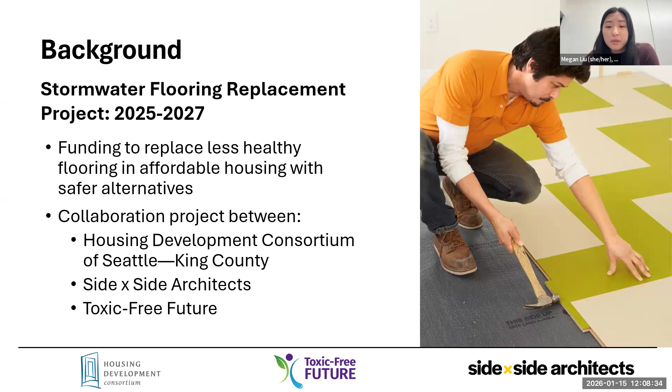Proposing to adopt safer materials in affordable housing, which would protect the health of affordable housing residents and reduce toxic waste and water contamination, we received funding of $1 million from the Stormwater Center in 2024 through the Washington State Department of Ecology, like Laura mentioned before.

And so right now we are currently underway with this project, and we are implementing this flooring replacement program by working with affordable housing groups in King County to replace less healthy flooring, such as vinyl and carpet, with safer options. Phase one is currently wrapping up, where we worked with DESC, providing funding for them to replace carpet in corridors and common areas with a safer linoleum flooring product.

Through this project, DESC was able to replace carpet in 6 buildings with linoleum flooring, which is safer for both health and the environment. And the specific buildings included 1811 Eastlake, Canada House, Morrison Hotel, Union Hotel, Rainier House, and Kerner Scott House. The specific carpet that they replaced was a Cambridge Oxford product. Again, this replacement was done in corridors and common areas, and that was replaced with a Forbo MCT linoleum flooring product.

As for phase two, we will look to expand upon phase one here and hopefully work with more groups across King County to replace hazardous flooring with safer options. This work will begin later this year to identify priority communities to partner with. And with what we've worked on and learned so far, especially from phase one and the research that we did going into it, we've gathered a lot of information on how this shift to safer flooring in affordable housing can be made. And we're excited to share these findings with you all today so that you can take this into consideration when specifying new products in affordable housing.

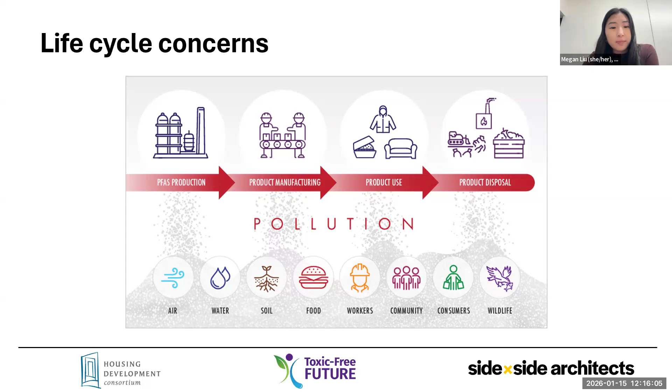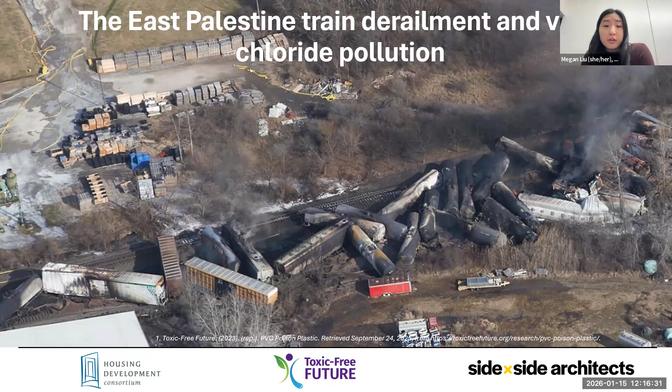And so this here is an example that unfortunately really captures why we are so concerned about the life cycle impacts of hazardous building materials. And this is the 2023 East Palestine train derailment in Ohio. Some of you might be familiar with this, but this is an incident where trains carrying toxic vinyl chloride, which is a known human carcinogen, actually derailed. We know that 99% of vinyl chloride that is produced is actually used to produce PVC plastic because vinyl chloride is one of the main building blocks of PVC.

And so when the trains carrying vinyl chloride derailed, this resulted in vinyl chloride leaking into the surrounding community. And the smoke plume that was released not only included vinyl chloride, but also other persistent harmful byproducts. And so we have actually found in our research at Toxic Free Future that the production of PVC releases hundreds of thousands of pounds of carcinogenic vinyl chloride into the air every year in the United States. So that also just goes to show that during production, this is already a concern.

But now with this example here, that was really, really unfortunate. We also know that transportation of these hazardous chemicals and materials in itself can also lead to further risks and harms to communities and environments along the transportation cycle.

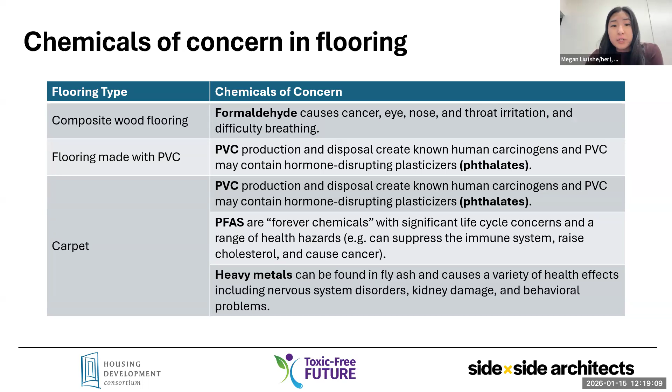And so these are all the things that we want to avoid, and luckily we know that there are safer materials that do exist. And so to wrap up my section of this presentation, I know I focused a lot on the concerns that we have around chemical use and the ingredients inside of our products. I want to say, though, that it's not all doom and gloom, and there are things that we can do to reduce harmful exposures to toxic building materials.

I would say that this flooring replacement program in itself is a huge success in recognition of the fact that we do need safer products, and that it is important for our communities to have safer building materials in their homes. I think this project really came together by the three organizations, HDC, Side by Side Architects, and Toxic Free Future, coming together and sharing our expertise. And that allowed us to really combine our knowledge and propose this plan to replace flooring in affordable housing.

I think the fact that we were able to receive funding from Ecology goes to show how important of an issue this is, and shows that they also agree that we need to make sure that we are using safe materials, being a critical thing for human health and the environment to prevent any disposal runoff when we dispose of these products.

Another thing here too that is really important, I think, especially for this audience, is it's important to note that Washington State actually leads the way on toxic chemical policies. One particular groundbreaking law that we have in Washington is the Safer Products for Washington Act. This is a program that is also run by Ecology. This is a law that was passed in 2019, which regulates priority chemicals of concern to health and the environment in priority product categories in 5-year cycles. I know that's kind of a mouthful, but basically this is a law that regulates different products and chemicals every 5 years in Washington State.

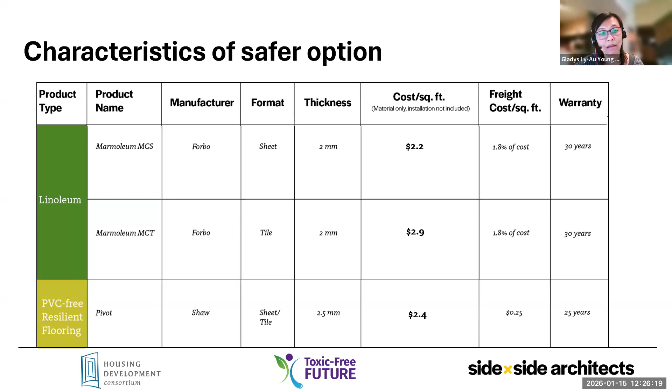So for our initial process, we researched over 40 flooring products. And the top row you see here shows some of these characteristics reviewed. There are more, but it's too many to show here. So then our final recommendation consists of 7 products, and here are 3 of them. And this research is cross-coordinated with Habitable's Informed red to green guidance, as you see the color chart on the left. I want to point out a few characteristics.

So vinyl flooring is typically about 2 millimeters thick, so any alternative should be similar in thickness. And vinyl flooring is also typically around $2 to $2.50 per square foot. An alternative would need to be comparable in cost. And linoleum, the safer alternative, can range in cost between $2 to $3.

So while there are comparable cost options, sometimes the cost of safer flooring might be more expensive, but it's important to keep in mind that these options typically have a longer warranty than vinyl, which has 15 years. As you can see, these options we are showing have 25 to 30 years.

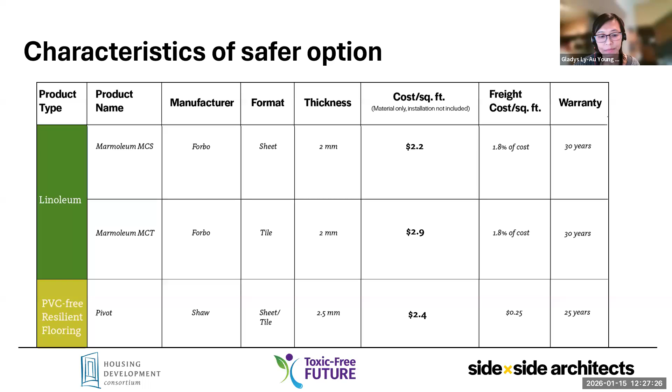So for this flooring replacement project, we have two criteria to meet when choosing the safer alternatives. Number one is using the Habitable Informed product guidance to select product types in the yellow and green section. And the other one is the product has ingredient transparency. I will introduce the Habitable Informed product guidance and the transparency in the next couple slides.

So Habitable Informed guidance is an intuitive red to green color ranking that compiles decades of their comprehensive research about health impacts of chemicals throughout the product life cycle. And as I mentioned before, Rebecca Stamm from Habitable reviewed our research on flooring products and helped us rank the products using the red to green color ranking. And I also mentioned that for the safer flooring criteria, we use the yellow and green section. So the full spectrum is from red to green, but we only allow the yellow, light green, and green rankings for our safer choices.

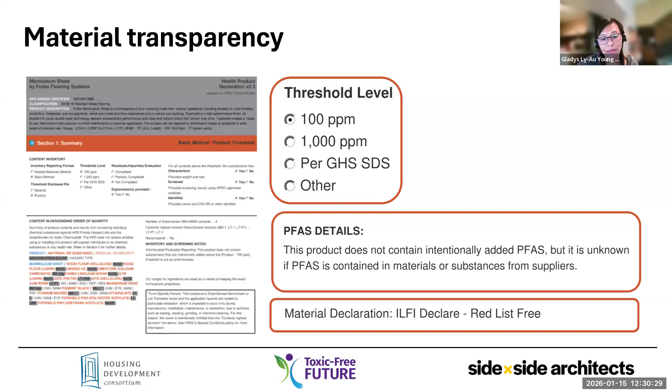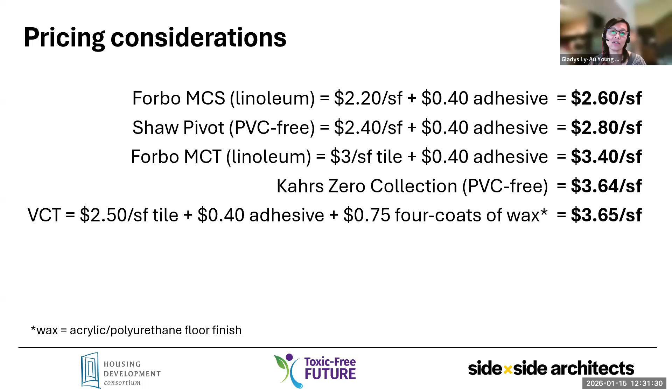The vinyl composition tile, VCT, is very commonly used and is around $2.50 a square foot without the adhesive. Sometimes what is not included in this cost equation is the coating that you need to put on top. And as you can see, it is really achievable if you put a little time dissecting the cost of what you're paying for the vinyl flooring.

Key takeaways for this phase 1. Cost, as I already mentioned, is one of the goals of the flooring replacement project: to help the affordable housing sector understand that there is cost parity, especially if we aggregate our purchasing power. So I spent time developing relationships with manufacturers and distributors to get lower costs for the affordable housing sector.

But some of these manufacturers are recognizing the importance of that, and they're offering everyone these lower cost supply chain and availability. So this group purchasing power will help shape our supply chain by indicating that the affordable housing sector needs healthy, non-toxic materials for our residents and our planet.

Okay, so durability is of course very important to everyone. DESC said that over and over again. So DESC already likes using the linoleum product because they've used it before in other projects. And they picked linoleum as the safer material that is easy to maintain and has a long service life. Linoleum has a 30-year warranty and a 50-year service life.

And the manufacturer, Forbo, told us that the savings over its lifetime are substantial. They said that Kaiser Permanente told them that every 100,000 square foot install saves them 1,000 hours in maintenance, as well as significantly less use of chemicals.

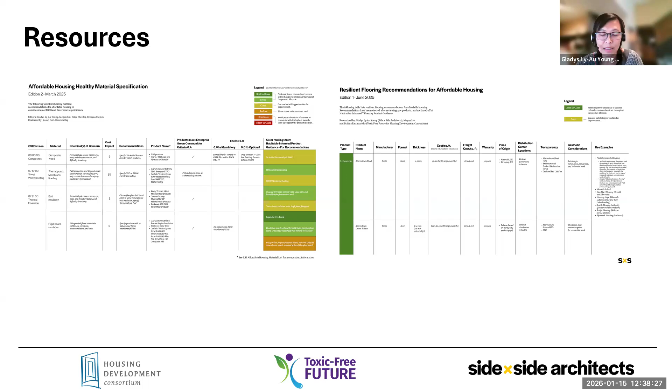Okay, now we're going to just talk a little bit about general shifts to safer materials in affordable housing. Only a few more slides left. We have time for questions at the end.

So it has been a long journey, but hopefully you can see that we're making meaningful progress. An example is one of the most recently completed affordable housing projects, where we have tried our very best to incorporate safer materials, given our many challenges, including our tight budgets. This project is called the White Center HUB Project. HUB is Hope, Unity, and Belonging. The client is a collaboration between the White Center Community Development Association, the CDA, and Community Roots Housing. We have 76 affordable housing units and a community center with health and social services.

With deep community engagement, I want to highlight one question that was asked at one of these community meetings: why does everyone I know have asthma? This links back to what Megan said earlier. Low income and BIPOC populations often have underlying health conditions due to increased exposure in their homes, jobs, and environment. So it is our duty when we do affordable housing to be cognizant of the upstream and downstream impacts on our entire ecosystem.

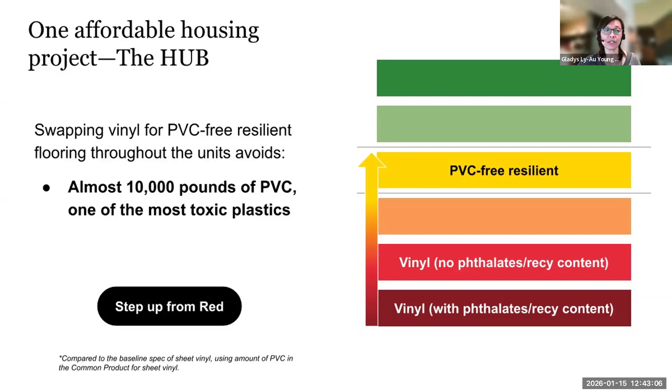Habitable ran this data for us again. For White Center affordable housing, the housing portion, by switching from vinyl flooring to a PVC-free resilient flooring throughout the units, the project avoided almost 10,000 pounds of PVC, which is one of the most toxic plastics. That is a really awesome data set they could provide for us. But you too could get this if you use their benchmarking tool.